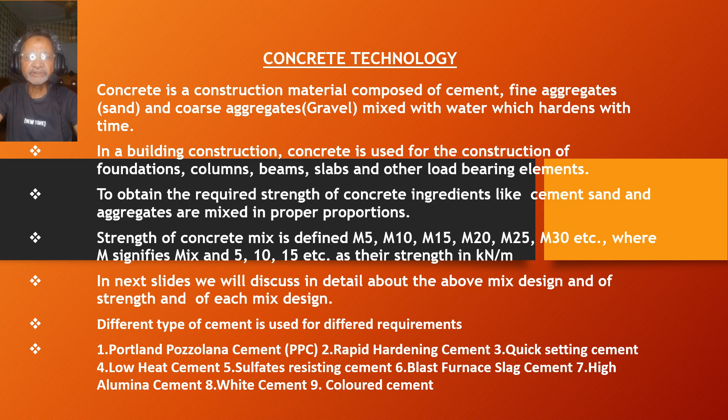Concrete is widely used in construction of different structures like residential buildings, commercial buildings, roads and highways, bridges, and all other infrastructure. So this is the brief description of concrete.

Dear engineers, we are now in slide number 4, in which we will discuss plain cement concrete or PCC. PCC is without the addition of reinforcement like steel bars, steel mesh or fibers. It has good compressive strength. It can withstand significant loads and pressures. However, its tensile strength is relatively low, which means it is prone to cracking under tension.

Plain cement concrete's workability depends on the water cement ratio and the type of aggregate used in it. PCC is durable and resistant to weathering, even in harsh environments. PCC is cost effective because there is no reinforcement, and reinforcement makes the concrete costly. PCC is used in subbase or base layers in pavements and roads, and provides a stable foundation for the next stage of the concrete.

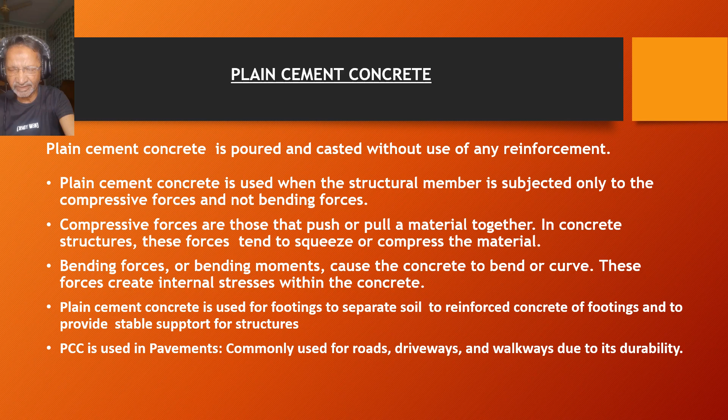So please go ahead with my slide, which has the details. I cannot discuss all the details in the slide, so I am discussing from my own written text. Thank you very much.

Slide number 5, reinforced cement concrete. Reinforced cement concrete is a composite material in which concrete is reinforced with steel bars, steel mesh or fibers to improve its structural performance. It combines the compressive strength of concrete and the tensile strength of steel. Qualities of reinforced cement concrete are: the reinforcement enhances strength and helps manage stress that arises from structural loads. The addition of steel reinforcement improves tensile strength, which means RCC can handle stretching and bending forces better than plain concrete.

RCC is highly durable and resistant to moisture, temperature and chemical attacks. RCC is crack resistant also. Uses of RCC cement are in foundations, columns, beams and floors in residential and commercial buildings, slabs also, and industrial buildings. It is also used in infrastructure like bridges, highways, tunnels, dams and other infrastructure structures.

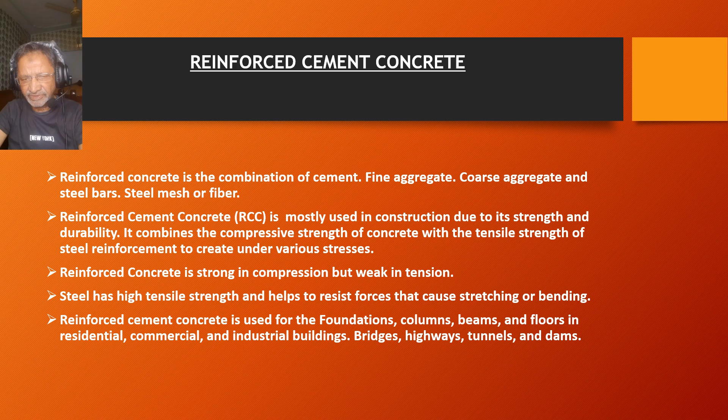Now we are going to study slide number 6, which is the most important topic of water cement ratio. Water cement ratio, one of the most important factors of concrete, is defined as the mass of water divided by the mass of cement used in the concrete. A typical range of water cement ratio in concrete mixes varies between 0.40 to 0.60, depending on the requirement of the grade of concrete.

Understanding the water cement ratio concept: a low ratio of 0.40 to 0.50 is used for high strength concrete mixes. Lower water cement ratio results in higher strength and durability but can reduce the workability, and it's laborious. A higher ratio of 0.50 to 0.60 is used for lower grade concrete where workability is more critical and the concrete is not required to achieve very high strength.

The typical ratio for the various grades of concrete is defined with the letter M. M is used in mix design to indicate the grade of concrete, where M stands for mix. The grade of concrete corresponds to the characteristic compressive strength of concrete after 28 days. There are different grades of concrete which you can see in the slide: M20, M25, M30, and above that also there are so many grades of concrete used for different structures.

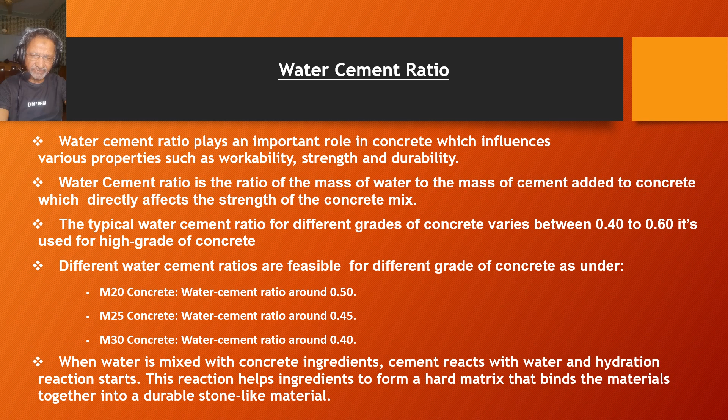Thank you very much. Dear engineers, in slide number 7, we will discuss the admixtures to be added in concrete. Admixtures are chemicals or materials added to the concrete to modify its properties and improve the performance, workability, strength, and durability. Different types of admixtures are used in concrete as per their qualities. There are different ones; we will go through them one by one, but not in detail. I will just list out

the admixtures. One is water reducing admixture. Second is setting time adjustment admixtures, and there are plasticizers, water reducers, super plasticizers, accelerators, retarders, air entraining agents, waterproofing admixtures, coloring agents, supplementary cementitious materials, and also bonding agents. All these additives are added to the concrete to improve the performance of the concrete, and sometimes to increase the setting time of the concrete.

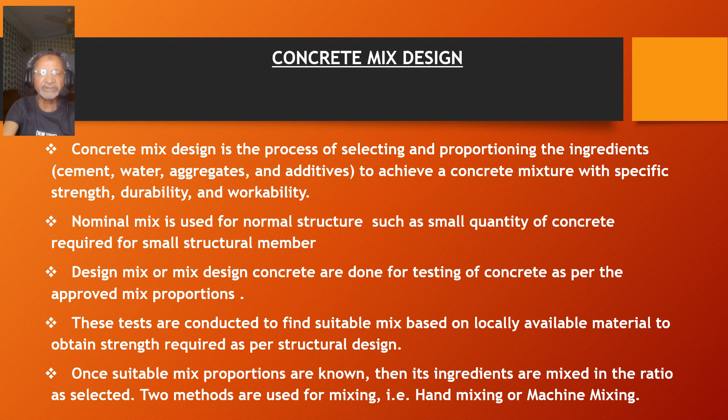Thank you very much. Dear engineers, in slide number 9, we are going to discuss the methodology of pouring concrete, which is the most important issue of the entire concrete technology. A few important points with respect to the methodology of pouring and curing of concrete, and the durability and strength of the concrete structure, are to be discussed in this slide.

Preparation and site inspection: ensure formwork and reinforcement are correctly prepared and fixed. Verify that all the components are clean and free of debris. All the equipment and tools are in good condition. Sufficient manpower is available at site. Formwork: check the formwork, see that it is secured and properly aligned. It should be well constructed to contain the concrete load and to achieve the desired shape.

Reinforcement. Ensure that reinforcement bars or mesh are placed correctly and tied securely and checked by the consultant. Make sure all the services are laid and checked by the concerned consultants. Mixing of concrete. There are different types of mixing of concrete. Batching: the measurement of the concrete ingredients, cement, aggregate and water, is to be done according to the specified mix design.

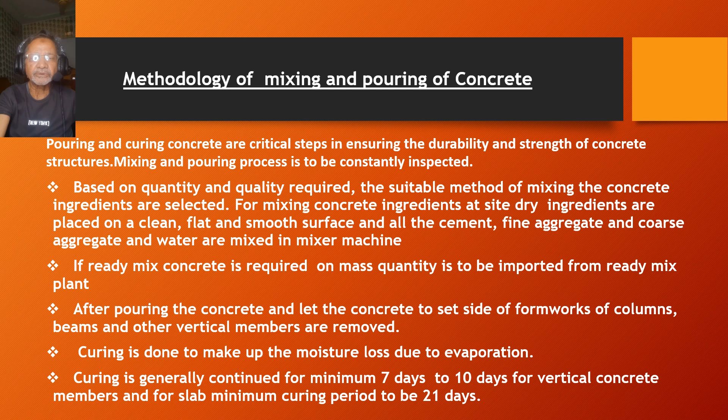Slide number 10. Engineers, you know very well what concrete vibration is. Concrete vibration means to compact the concrete. Definition: concrete compaction is the process of removing air bubbles and voids from the freshly poured concrete to ensure it is dense and homogeneous, to obtain optimal strength and durability. Mechanical vibrators are used, which help the concrete flow smoothly and quickly in structural members.

The use of concrete vibrators and compactors is to improve proper compaction, ensuring that the concrete has the intended strength by eliminating air pockets and ensuring a dense and uniform mixture. Enhancing durability: dense concrete improves its resistance to water leakage or seepage from the concrete structures. Reducing shrinkage: well compacted concrete reduces the risk of cracking due to shrinkage.

There are different types of vibrators to be used: diesel vibrators, petrol vibrators, electrical vibrators, as per the need. Also, there are different types of needles to be used as per the section of the concrete members: small needles, medium needles, and large needles. So all these things are to be taken care of, and the vibration is to be done properly so that you can get a good result out of the concrete. Thank you.

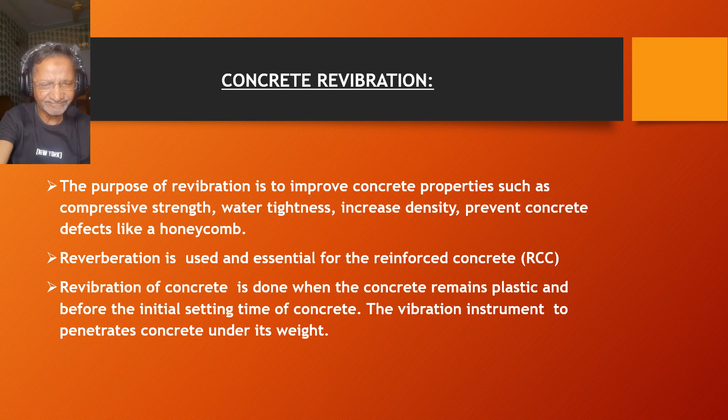In slide number 11, dear engineers, we will discuss the grade of concrete. Concrete grades are categorized and classified based on their compressive strength, which is determined by the maximum load the concrete can bear per unit area after 7, 14 and 28 days of curing. We will highlight a brief description of the common grades of concrete. M5: compressive strength 5 megapascals. It is generally used for non-structural applications such as leveling and filling minor cracks or for some pavements, etc.

M10 concrete: the compressive strength is 10 megapascals. It is often used for small structural works like pathways and for filling purposes. M15 concrete: the compressive strength is 15 megapascals, and the usage is low strength applications like foundations for small structures. Above M15, there are M20, 25, 30, 35 and up to 50 and above. All these grades are used as per the requirement of the structure.

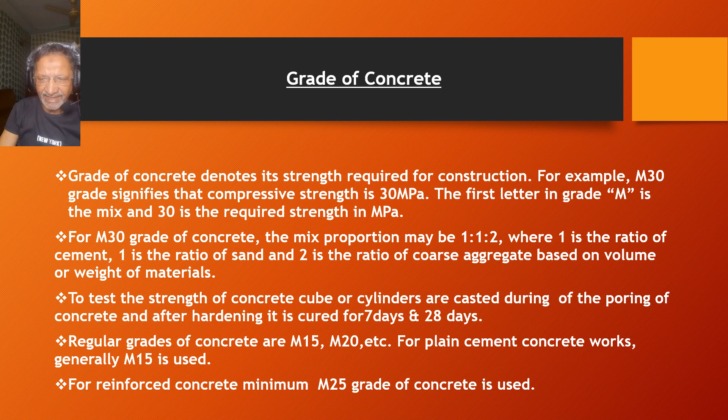Dear engineers, we have completed the presentation on concrete technology part 1. Very soon I will upload part 2 on the same topic.